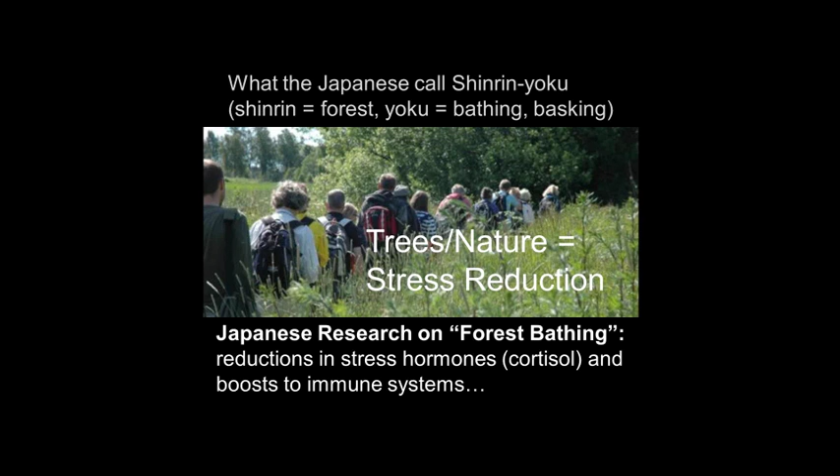So what do we mean by this concept of biophilic cities, and how might we express that? How can we articulate that? There are different ways of doing it. We could do it in a narrative sense, and here's one effort.

This is essentially the pledge that we have online: biophilic cities are cities that place nature at the heart of their design and planning, cities that actively protect, restore, and celebrate nature, biodiversity, and wildness, cities that recognize the profound power nature has to make us healthier, happier, and to lead more meaningful lives, and cities that seek to foster deep connections to the natural world. So connectedness, connections to nature, fostering connections—a big part of this.

For us, we're trying to push the envelope a bit and imagine an even deeper sense in which cities could be biophilic—imagining that cities could be places that immerse us in nature, surround us in nature. So city in a garden, city in a park, city in a forest.

One of our partner cities, Singapore, has recently changed their motto from 'Singapore, a garden city' to 'Singapore, a city in a garden,' which seems like a small change, but it's actually quite significant. Imagining that in the city, we don't necessarily need to walk to that park—why don't we imagine that we're living in the park, or living in the forest?

In Singapore, they've done a remarkable number of things, including a landscape replacement policy that requires any building in that city to incorporate nature. This is the Park Royal Hotel, a pretty amazing living building with incredible sky gardens and nature all around, actually contributing to nature from the perspective of someone walking by it. Singapore may be our best example of a city coming close to this immersive vision of a city.

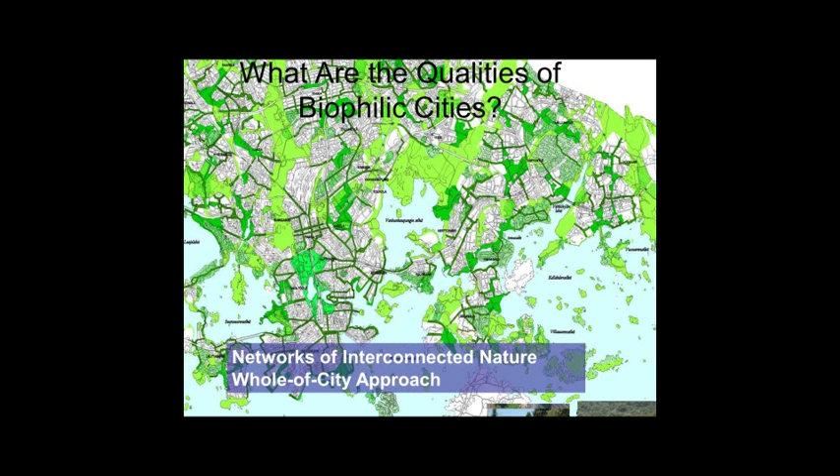Lots of other things, we could talk about different design qualities of a biophilic city. We would argue that a biophilic city is one that represents a network of green spaces and nature close to this immersive idea. This is an image of Helsinki. The notion that you walk out your door, you have nature all around you, and you can move to progressively larger amounts of nature as you move away from your home or your office.

And so here in Helsinki, in this image, the idea of moving from a dense urban core out to old-growth forests at the edge. Sometimes we talk about this as a whole-of-city approach, so it's rooftop to room, to region, rooftop to bioregion, and all of the scales in between. Nature needs to be thought about at every level, of course.

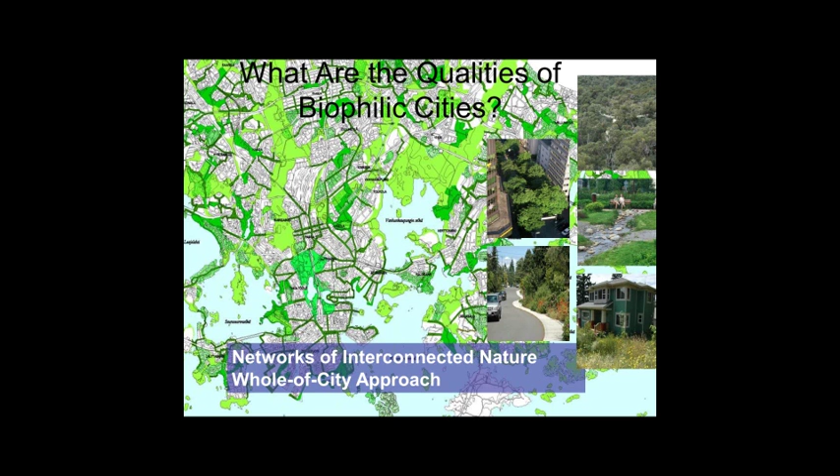We've had an active, ongoing discussion about what constitutes nature. Nature, of course, is a culturally defined term to a certain degree. And in the biophilic community, we may hear more about this with the other speakers, there is, of course, a belief in the importance of materials, building materials, and shapes and forms from nature.

The image on the upper left is from a guy named Marc Grañén, who's a Spanish designer and artist, and he's developed a system for installing green rooftops on the roofs of buses, and there are a couple of cities in Spain that have buses like this running around. Is that nature? Well, it's one aspect of nature, and so we have this broad notion of what nature is. It's not always just living nature, but lots of other ways that biophilia, that we can connect with nature.

I'm quickly running out of time. I want to make the point that a biophilic city is not just a city that has a lot of nature. It's not just the presence or absence of nature. It's how we connect with that nature. It's the human engagement of that nature. How much do we care about that nature? Do we recognize common species of flora and fauna? Are we engaged in restoring nature? Are we outside? What portion of our day is spent enjoying nature? So it's the engagement as well as the amount of nature.

We've been pondering this question, others have as well. Is there something like a minimum daily requirement of nature? We think there is. We're not sure what it is. In our Biophilic Cities network and our project, we are conceptualizing this recently through this concept of a nature pyramid, kind of similar to the food pyramid that we've been using as a way of guiding a healthy diet. So the things at the top of that food pyramid are things that you would eat, but not in large quantities. You want to build your diet based on the fruits and vegetables and things at the bottom of that pyramid.

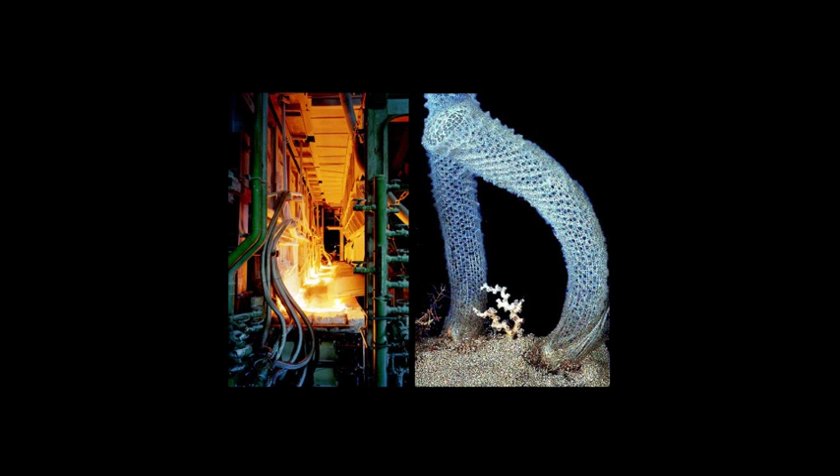Let me say a little bit about what I mean by biomimicry. These are two contrasting images. On the left, you have glass production as it's conventionally made in human manufacturing, and on the right, you have the biological equivalent, a glass sponge. We use very high temperatures and sometimes quite high pressures to manufacture materials, whereas biology has evolved to do it at ambient temperature and ambient pressure. The glass sponge actually has optical fibers of higher optical quality than man-made fibers, and that's all made just with available materials at very low energy.

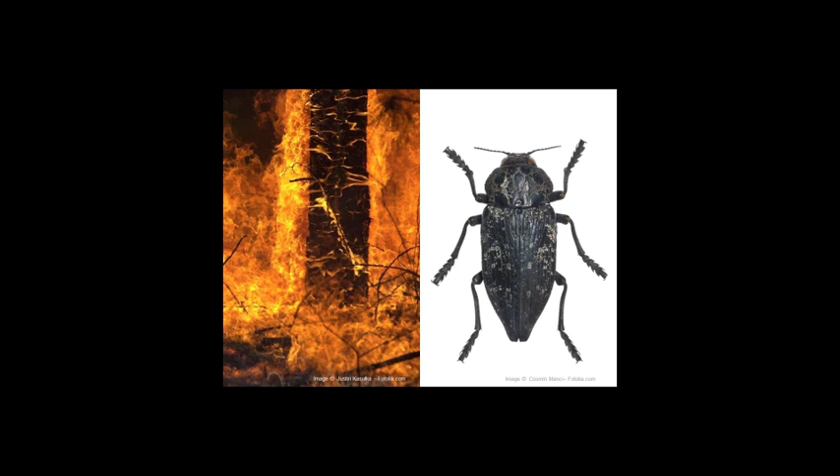Here's the biological equivalent of fire detection. Whatever room you're in, you can probably see a fire detector, and that fire detector has a continuous connection back to a power station burning fossil fuels. It probably has a range of only about 8 meters. Yet this beetle can detect a forest fire at roughly 80 kilometers, 10,000 times the range, and it doesn't need a continuous connection back to a power station burning fossil fuels. The key thing is, if we could learn to do things the way nature has evolved to do them, we could really start to make radical increases in resource efficiency, doing far more with far less.

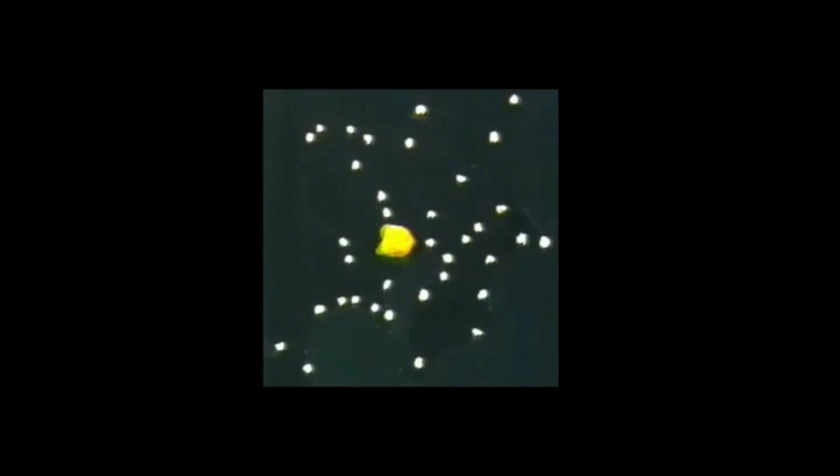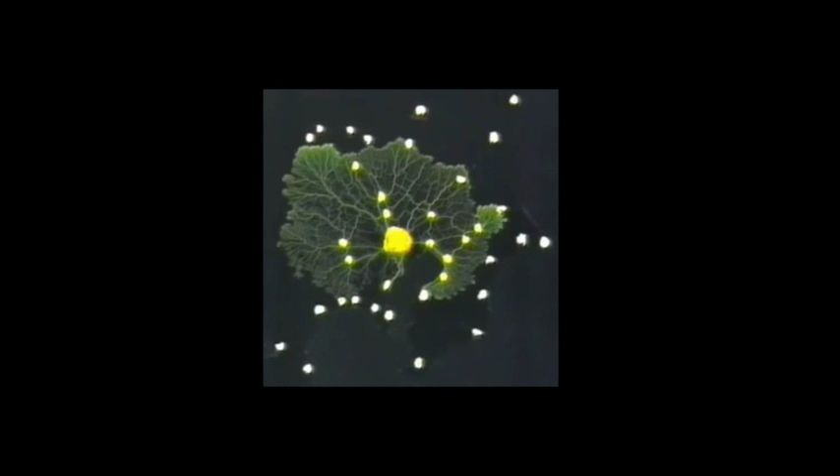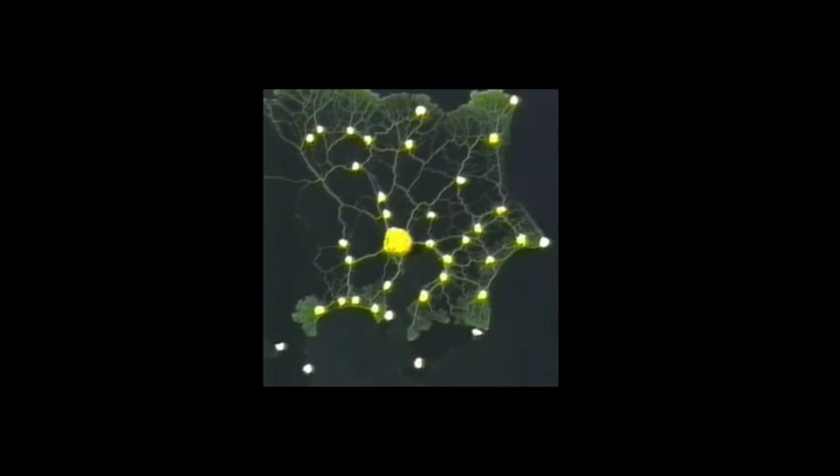Here's another example I like: the dog vomit slime mold. Slime molds are single-celled organisms, and they form minimum distance networks between sources of food. In 2010, some scientists at Hokkaido University carried out an experiment with a map of the Tokyo region. They put a little source of food on each of the cities surrounding Tokyo - those are the little white dots - and then they put a slime mold on Tokyo itself, the big yellow blob. The slime mold spread out, located all those sources of food, and started optimizing the connections between them. When it had finished, that layout exactly matched the railway network in that part of Japan. But whereas it had taken engineers thousands of hours to arrive at that optimization, the slime mold did it in just 26 hours.

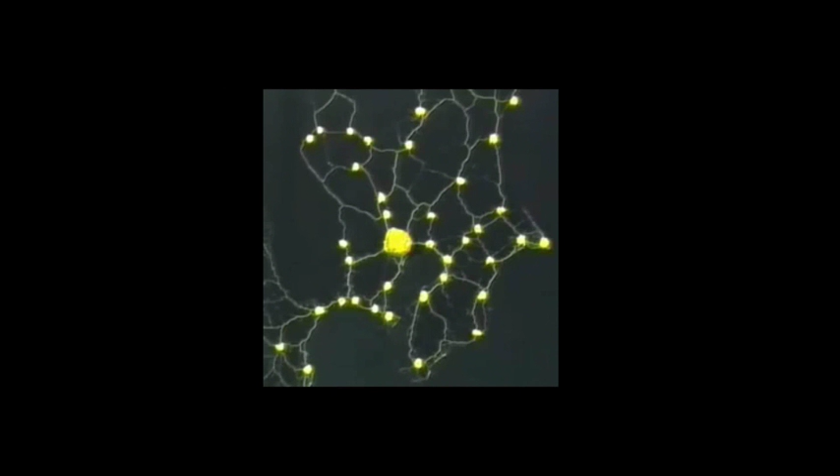So if we could learn to do things and solve challenges the way biology has, again, we could start to do things much more efficiently, saving energy and resources.

So the first project I'm going to talk about is the biomimetic office. If you're going to incorporate planting into buildings, there's a very good reason for doing that, but you need to design for quite high levels of daylight. That was one of the primary drivers for this building. We wanted it to be as far as possible naturally lit.

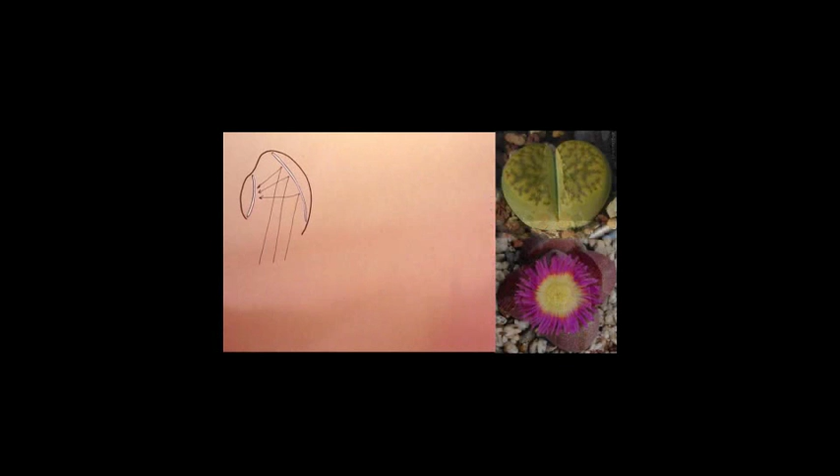We insisted on having a biologist as part of our design team who helped by identifying biological examples of light harvesting. This one is the spookfish. It has a mirror-shaped eye which can focus very low levels of bioluminescence coming up from the ocean onto its retina. Another one we looked at is the stone plant.

This is a plant that lives in deserts, and for reasons of thermal stabilization, most of the plant is below the ground. That means the chemical reactions can take place at a very steady temperature, and there's a roof light at the top that allows that light to come down into the plant.

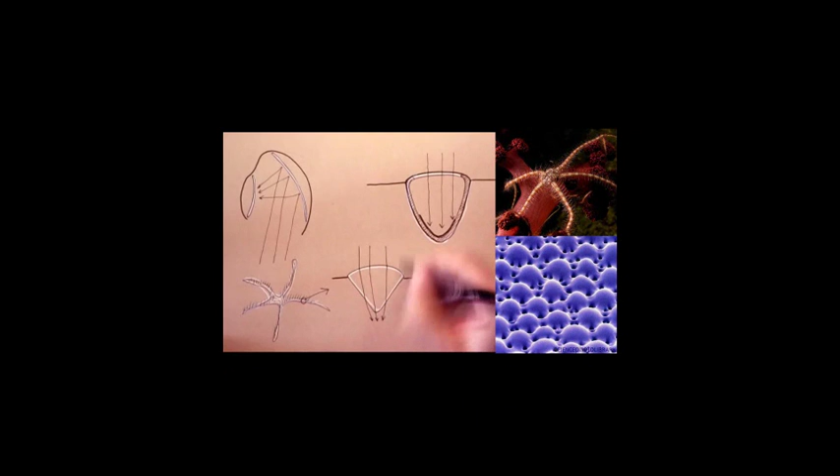Another one we looked at is the brittle star. This is a starfish that lives as much as 500 meters below the ocean surface, where light levels are incredibly low. It's evolved a covering of near optically perfect lenses over its skin, able to detect very small amounts of movement and light, so it can see predators before they see it. All of these encouraged us to think much more creatively and deliberately about how we would bring light into the building.

A fairly conventional way of designing for daylight in offices is to look at the right distance between window walls. In London, you can find lots of examples of really deep office floors, maybe 25, 35, sometimes even 40 meters between windows. You know those are going to be high energy buildings because they'll be artificially lit and air conditioned.

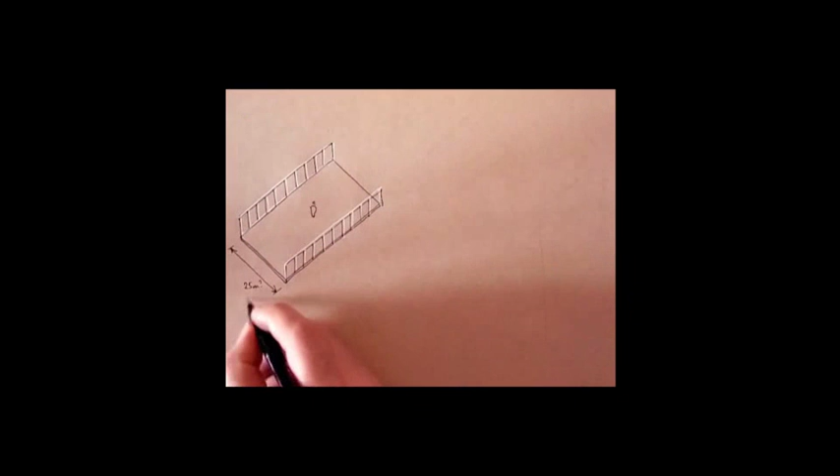We decided that the right dimension was about 12 meters, so no one was further than 6 meters from the nearest window.

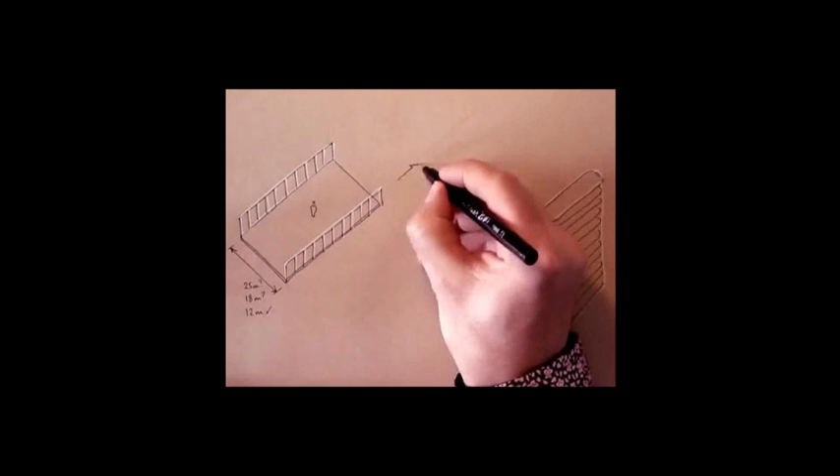Thinking about what this translated into in terms of building form, one approach would be to take these narrow floor plates and stack them into a tower form. That would be fine if we were dealing with high land values in a central urban location, but we wanted to develop a more universal concept than that.

So we looked at two other building forms. One was a ring of offices around a central atrium, and the next was a more linear approach: two linear blocks with a linear atrium.

It was the third one that seemed to work best when we analyzed light levels. Using daylight software, when we looked at this in plan, we found we were getting a curved pattern of shading around the middle of each block because of the shading effect of the opposite block. So the next move was to simply bend those floor plates so that we get a very even quality of light all the way along.

This produced two further challenges. Firstly, narrow floor plates aren't great for creative clusters of people—you need some wider areas. Secondly, this wasn't making very efficient use of a rectangular site, and we were probably going to end up with a rectangular site.

So then, learning lessons of surface area to volume optimization in biology, we elaborated the plan form into this undulating form. We still had no point further than 6 meters from the nearest window, but now we were getting much better facilities for creative clusters of people, and we were making more efficient use of a rectangular site.

Still with daylight, we looked at the building in section, and found it was reasonably easy to get enough light at the top. The challenge was how to get the light further down.

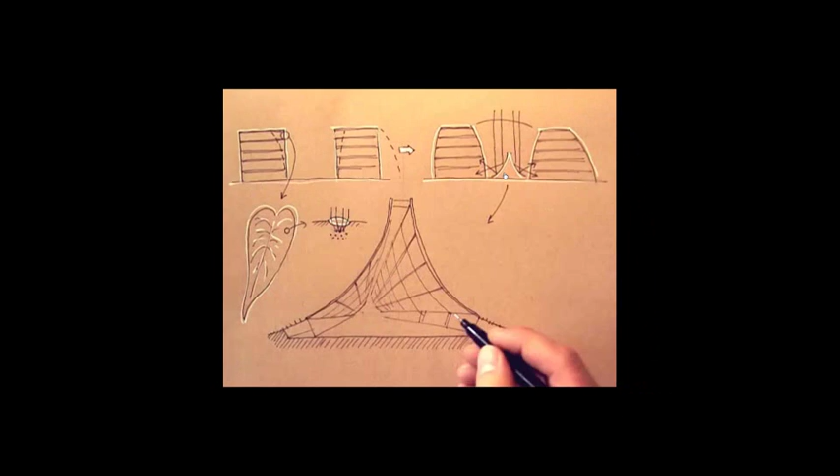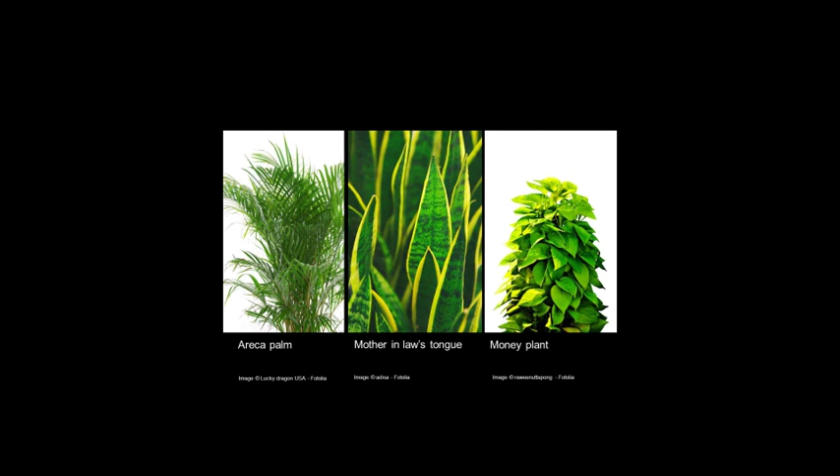Looking at this space underneath, in biology, often structures serve multiple functions. So we decided this would be a great space to turn into a really dramatic meeting space that would add value to the building. Designing for high levels of daylight means you can incorporate a range of plants, and NASA concluded these ones can deal with nearly all the contaminants in indoor environments.

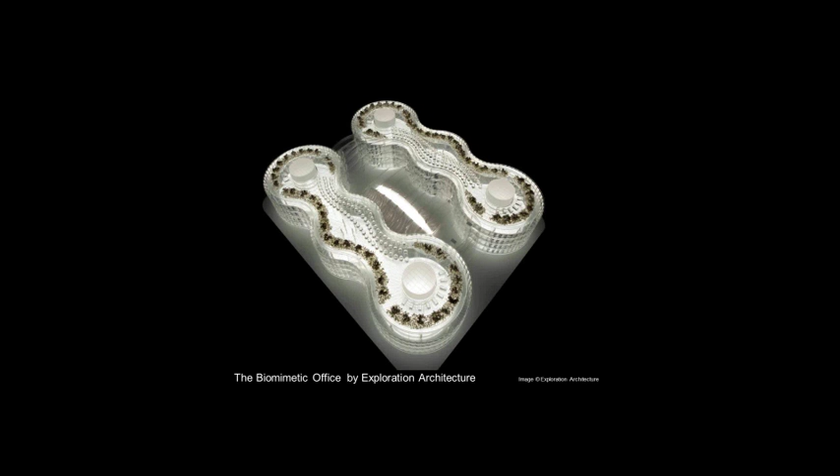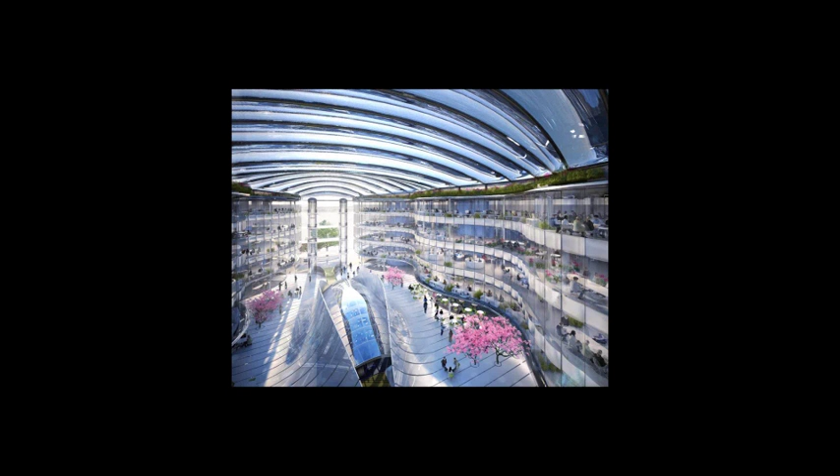This is how the scheme looks now. The form is very much driven by daylight. That's the spookfish light reflector in the middle, and that's another view. This is how the atrium would look, flooded with natural light. The engineers involved have predicted it should be one of the lowest energy buildings in the world when it gets built.

Now moving on to another project. This is one we've been working on in India, the Zero Waste Factory. There were a number of things we were trying to do here, using biological approaches to water treatment, biological systems as a way to move towards zero waste, and trying to incorporate really generous amounts of planting on both sides of the factory. So the factory has roof lights throughout, and every part of it has views out to nature on both sides. That's radically different to the conventional model for textile factories in India.

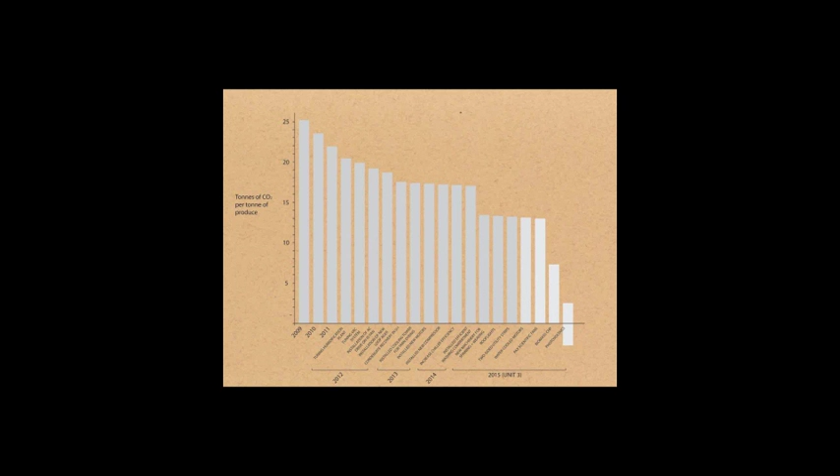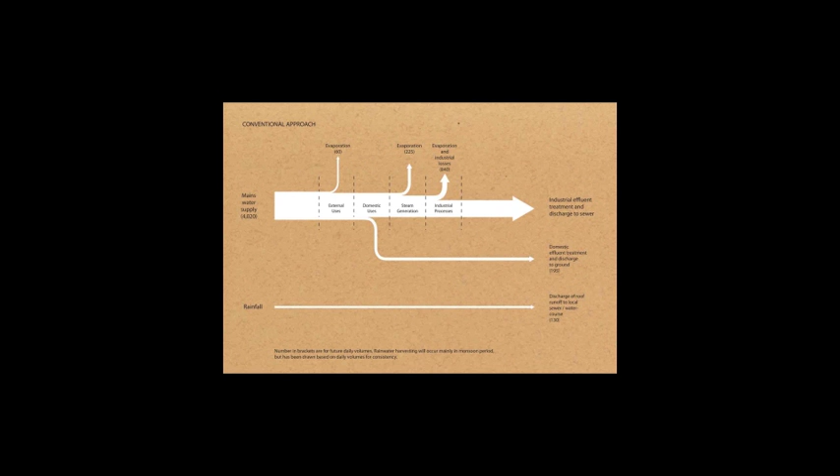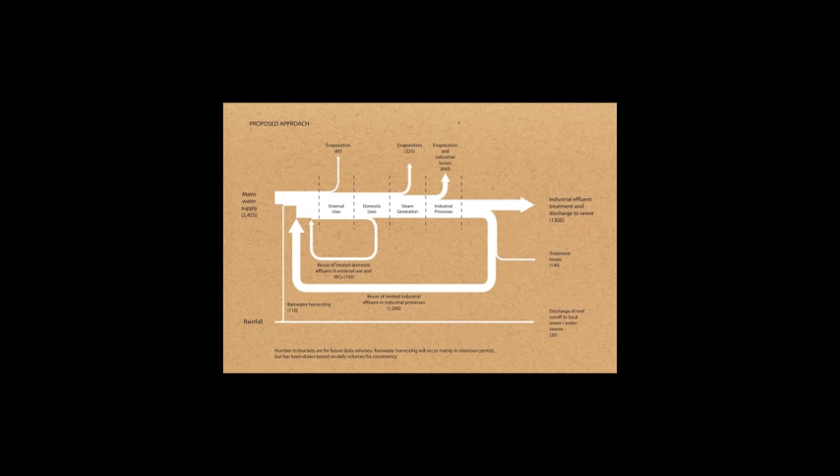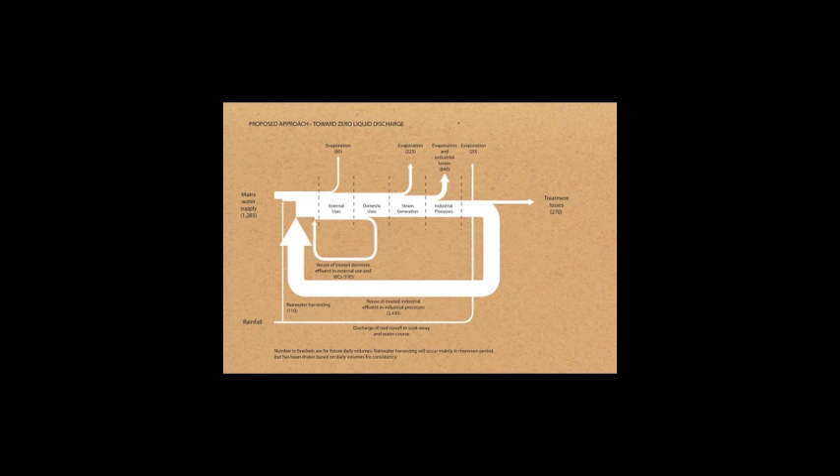The client had already done quite a lot in terms of energy saving, so our main focus was on turning the water system into something much closer to a closed loop scheme. This is a fairly conventional approach. This is the approach we're proposing, where most of the water gets treated using biological forms of treatment. There is an approach that gets closer to zero liquid discharge, but at the moment that's looking a lot more expensive, so we're working with the client on trying to reduce that.

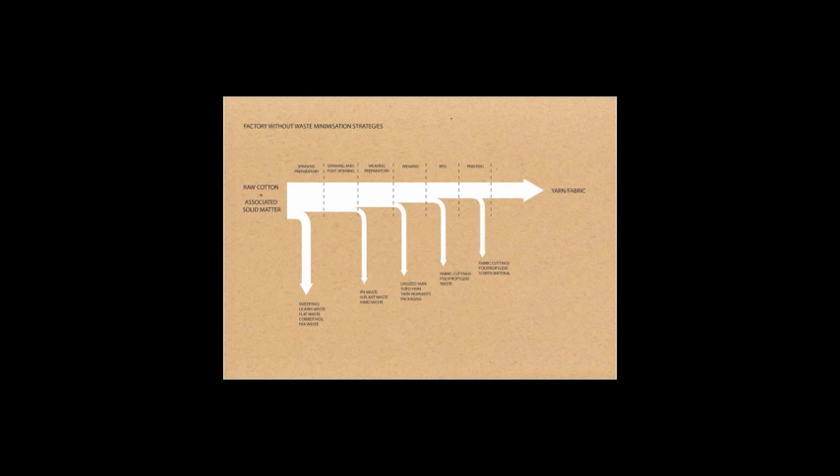And then this is the solid waste. This is a conventional approach, which produces a lot of waste materials. We've found, working with the client, that we're actually able to turn most of those into materials that can be sold for other uses.

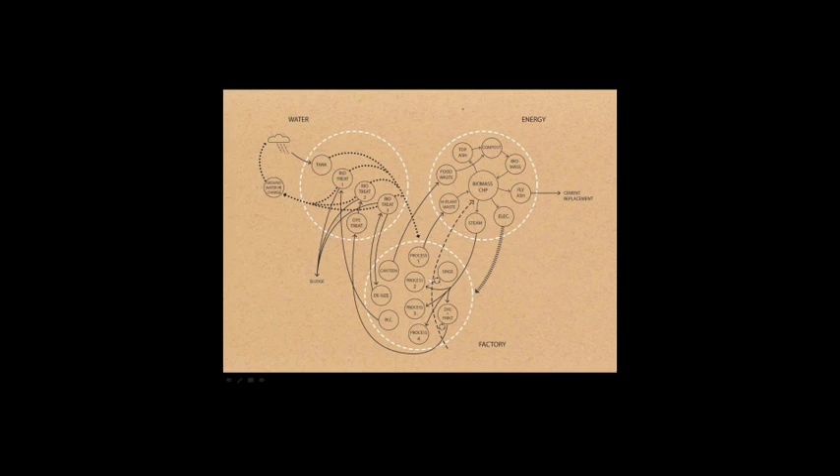We managed to design out most of the problematic dyes, so most of this stuff can be treated with biological forms of treatment, and the water can go back into the process. So that's another view - all this down the middle is part of the biological water treatment. We're trying to get dual benefits: it's doing the job of cleaning the water, and it's also serving an amenity or biophilic benefit, giving people something nice to look out onto when they're working in the factory.

And finally, we've only got three minutes left - the Sahara Forest Project. This is a model based on a beetle which harvests its own fresh water in the desert, and that turned into a type of greenhouse that is cooled and humidified with seawater. So we can grow crops in arid regions with a fraction of the water of conventional approaches, and it actually allows us to harvest some of that water in the same way as the beetle does.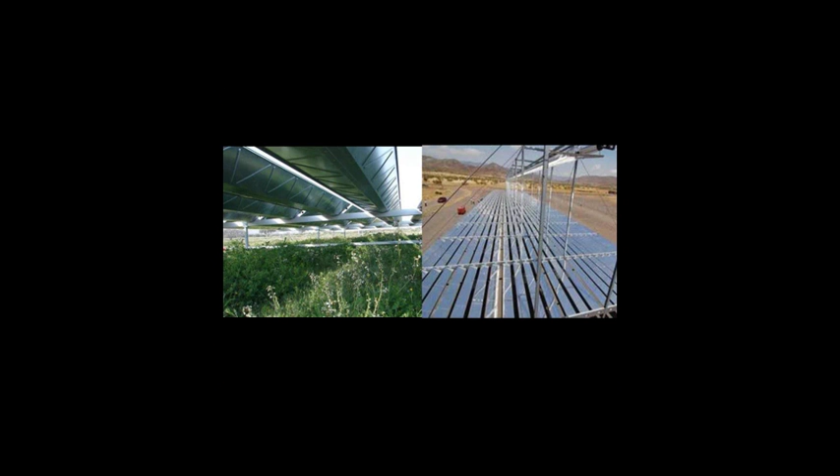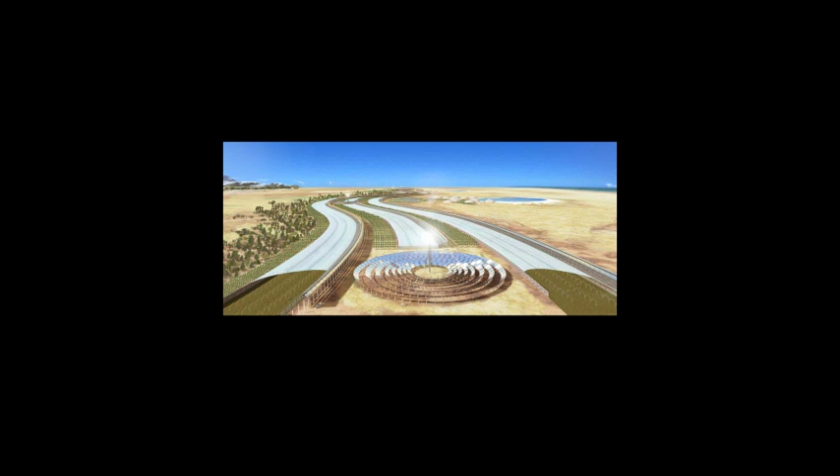We're putting that together with forms of solar energy that have very interesting synergies. The shade created by those mirrors or solar panels makes it possible to revegetate areas of desert underneath. This is a sketch of what we're proposing, and this is how it would look at large scale. It's a model for how we could create zero carbon food in some of the most water stressed parts of the planet, as well as generating renewable energy and locking up carbon back in desert soils.

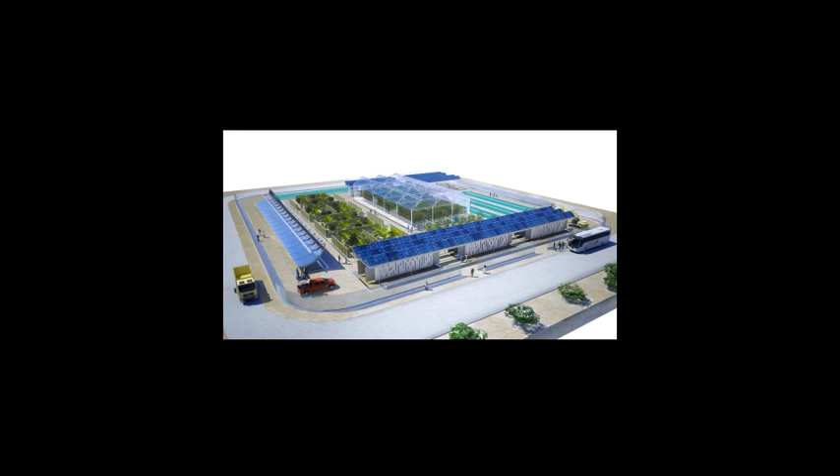I'm going to skip through now, running short of time. We built a version of this, opened in 2012 during the climate change talks in Qatar. Apart from all the technical aspects of the project, we also monitored what happened to the biodiversity on site.

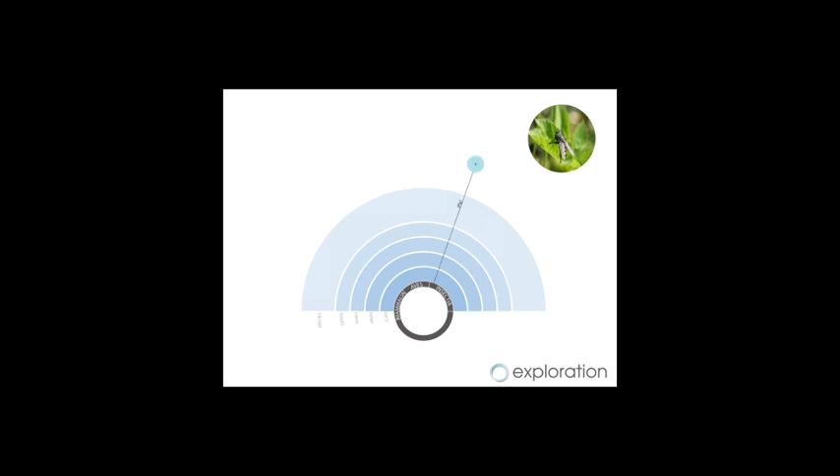It was a bare patch of desert to start with. This diagram shows what happened over the course of the next 8 months in terms of birds, mammals, and insects. The first things to appear were flies, nothing too interesting there. But the same day the first plants came to site, we had the first birds appearing - common house sparrows - and also the first insects, grasshoppers and crickets.

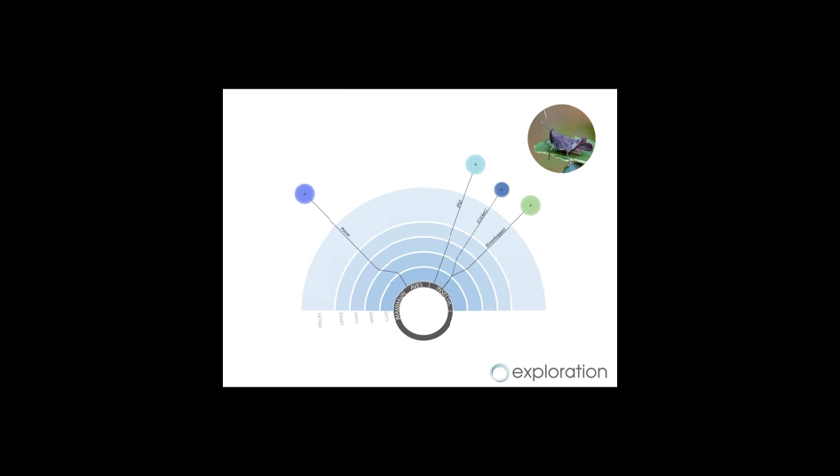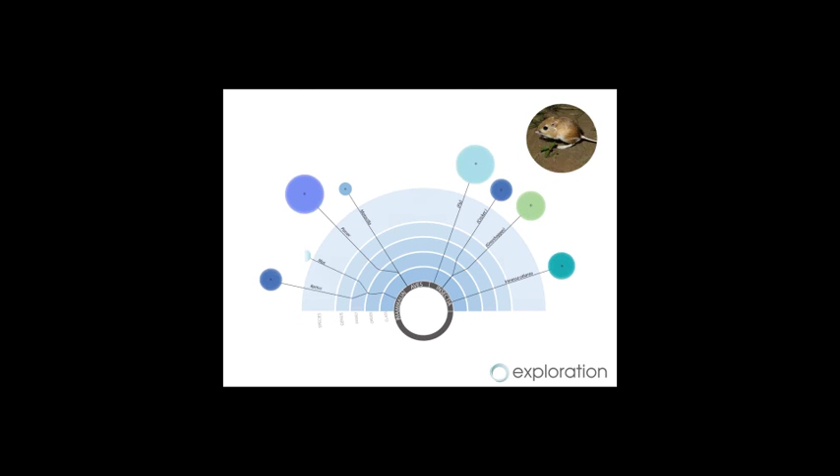About a month later, we had the first butterfly and more types of bird, wagtails. We had more and more insects. Then we had the first problematic species, rats, and they started multiplying rather quickly. We also had mice. The number of birds was increasing. We had the first dragonfly 3 days after the algae ponds were filled.

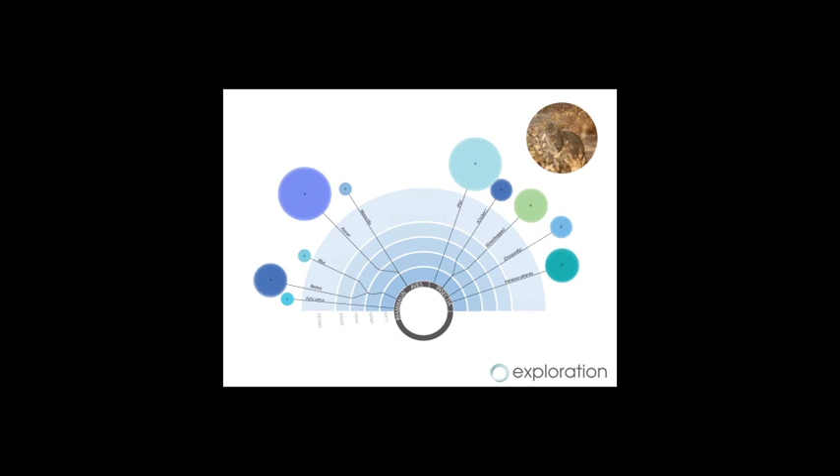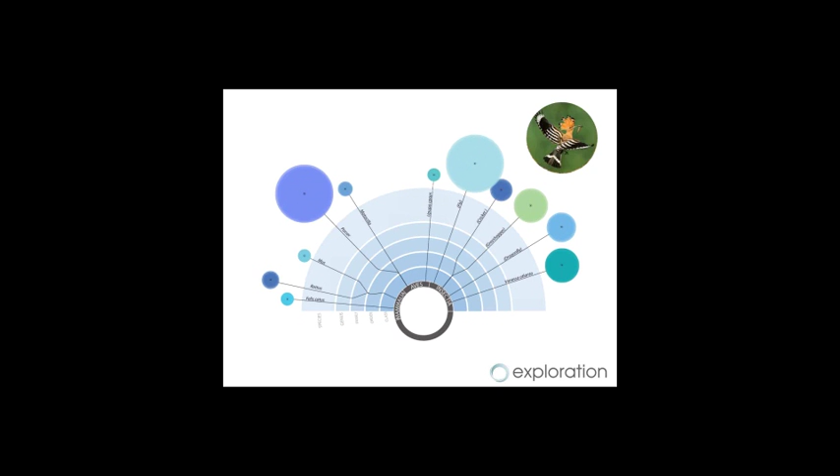Then the number of rats started going down when a feral cat appeared. The bird species carried on increasing. This was a fairly rare bird, a hoopoe, which we saw on site. And then when the halophyte plants were planted, we had rufous-tailed shrikes and more wagtails. Eventually we had the first example of an indigenous mammal, called a jerboa.

And all that was achieved in just 8 months on a site 100 meters by 100 meters. I find it very encouraging to see that nature, if you give it the right opportunity to recover, has an amazing capacity to recover. And that's why I feel these models of regenerative development are really strong ones that will allow us to develop cities for the ecological age and to restore some of the damage we've done to ecosystems over the last century or so. Thank you.

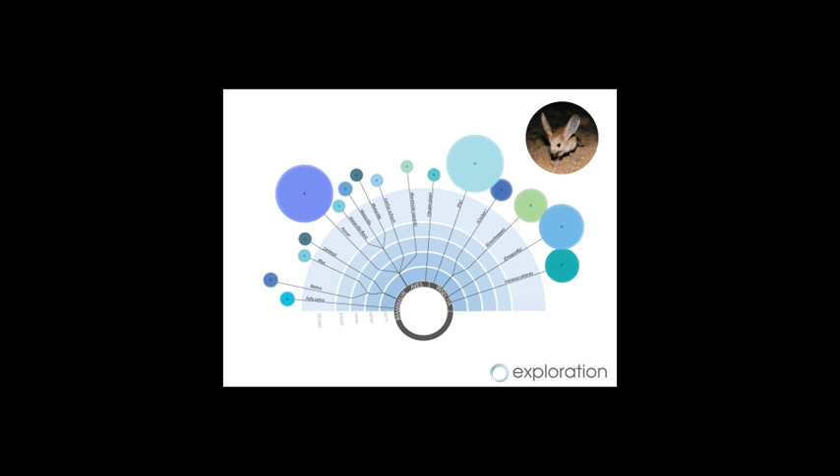These first two talks we've had really emphasize how expansive the idea of biophilia and biomimicry can be for designing spaces for humans and nature to coexist.

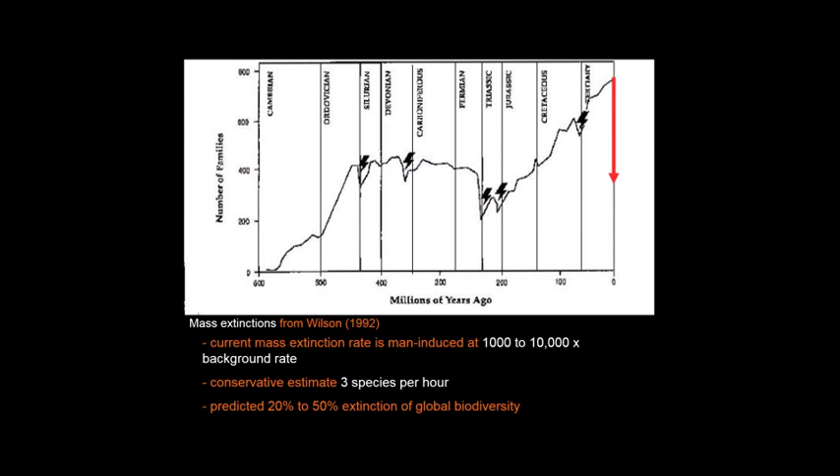Another key sense of urgency is the mass extinction we seem to be creating, on a par with previous mass extinctions in geological time. And as Tom Wolfe said in The Bonfire of the Vanities, no one seems to be able to take reality straight anymore. We drug ourselves, take various tranquilizers to get through life, and urban pathologies are quite rife.

Now, what is an urban landscape? This wonderful book on the urban cliff revolution, which I recommend reading, shows how separating buildings and landscape around it is quite often how projects treat greening and landscaping, but actually that's a false dichotomy. We came almost certainly from scree slopes, rocky cliff sides, and then caves. Nearly all the plants we eat came from those original ancestral habitats, so it's not at all surprising to be living in high-rise settings around landscapes.

Therefore, the point is that landscape is buildings and structures as well. The idea of urban landscape as a term is relatively new, and it's worth reinforcing, because so often in projects the two are separated.

This quote from the European Landscape Convention makes the next step, which is it's not just buildings and the landscape around them, it's people. That's obvious in a way, but the interactions between them create something which is not either of those things. It's not a physical thing, but a conceptual, psychological thing.

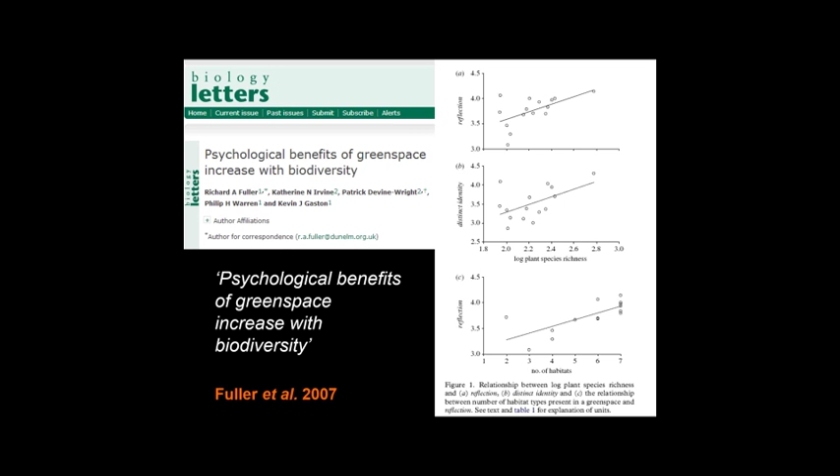We need to make this sophisticated in relation to biodiversity, because biodiversity - essentially an indicator and product of the ecosystem, or underpins it - also relates to the ecosystem services you get linearly. Here's a paper from the UK which shows that our psychological benefits increase with the biodiversity content of parallel ecosystems.

This is a paper I wrote with Ken Yeang, which underpins this and says: look, in industry terms and in offices, if an office development with lots of money can do something to restore ecosystems, then the ecosystems can do an awful lot for the profit of those companies.

This was the first time the British Council for Offices looked at the thing as a two-way street, rather than just what can they do for nature as a sort of charitable sop.

And now we are getting into the world of economic valuations. I'm not saying that everything in nature needs economic valuation, but having thought long and hard about this - if economic valuation can get us where we want to be, frankly, I don't care. We need to do anything we can to stop really bad decisions.

For all the beautiful images from Tim and from Michael, the actual model around the world that is still the norm is urban sprawl, with very little of anything we've been shown.

This is a wonderful publication worth looking at from the wonderfully named Terrapin Bright Green from New York City, which starts to explore these economic arguments, which need to be at the fingertips of every designer and every ecologist who works on the urban condition.

I'll leave this thought with no further elaboration: if you're dealing with a developer who's creating benefits for others, what does he or she get out of it? I've been working more and more with the idea of marketing - what's the point of innovating if you don't market what you've got? You have to trust the market to understand that what you're selling is better. Then the people building all this can get benefit.

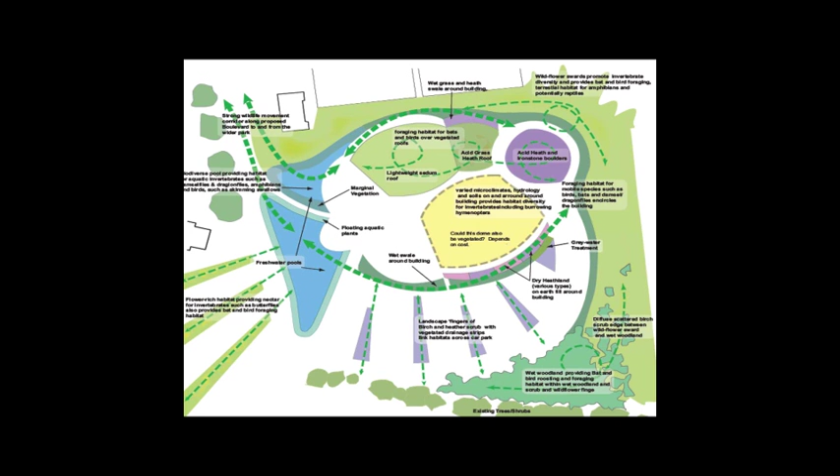We can also create installations that function with nature, with strong reference to past cultural environments, keeping what Alexander Pope called the genius loci, and incorporating biological indicators when we do.

One example from London, on the River Thames - an old oiling site for Shell oil with a big jetty outside for ships to turn up. But in its derelict state it had a covering of cormorants and herons, very unusual to see so many in this part of London. They were all going to be lost because this sort of development has no room for them.

So we put in floating hotels, which we built in Germany and brought over, and the birds used them. I saw a man from Holland and asked him why he thought that was done. He said, well, those are fish birds, right? And fish birds means fish in the river, which means a good place to live. These indicators and the sense of place and time can be done with gestures that are as much artistic as ecological.

We can show how interventions can not only be biophilic and biodiverse, but can have impacts well outside their boundaries. Again, in London, at Greenwich Peninsula, here is a derelict area which had the biggest gasworks in Europe. Instead of leaving the old wall or rebuilding it, we cut it down and created a terrace that floods with the tide.

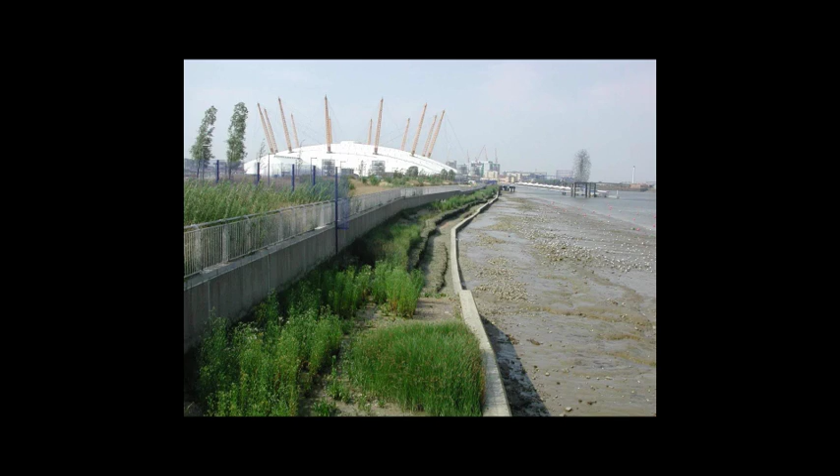That becomes very biodiverse. We explain what all that is doing as an ecosystem, and it becomes the biggest artificial sea bass nursery in the UK. Those fish then go out and become the fish in the North Sea.

We can show the power of multiple biophilic interventions when we start talking scale - that's coming up again in the next URBIS webinar. So at Stratford, the athletes' village in London, now best new place to live in London, Mayor's Water Design Excellence, all that stuff - the whole point was to try and make these sorts of interventions writ large, from living roofs down to ground landscape.

So living roofs based on four types of UK natural habitats rather than just greening. And then down at ground level, the water filters through wetlands, which people have told me they've set up their shops purely because of this environment there.

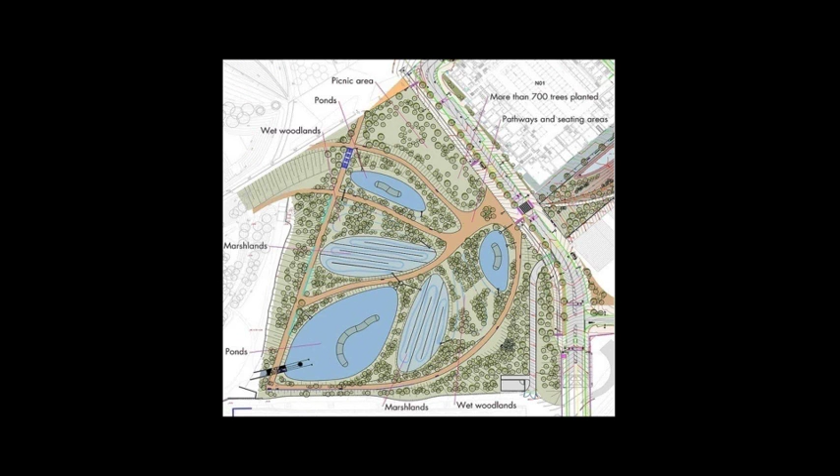A final treatment wetland, which itself is a piece of land art, has many different ecosystems to treat the water and polish it, putting it into a final polishing lake. From there you can flush toilets in a new school at the top of the site and start to close the water cycle loop and make it beautiful.

And then we can set targets for nature - I've thought about this quite a lot, and one of the problems is that engineers and architects are taken seriously while biologists are not in urbanism, generally speaking, when it comes to design teams. Part of that is because we don't take ourselves seriously.

If we have the sorts of metrics that Michael was showing in his presentation on the Sahara Forest Project, then we can start getting quite good at predicting what's going to happen, and sell that, and actually use it as a metric, a measure of success.

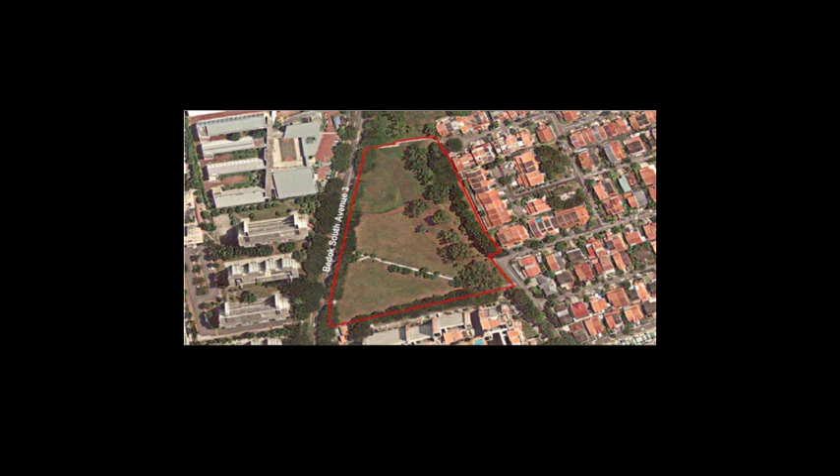So, for example, in Singapore, an urban site to be redeveloped had this marvelous target set by the government of being ecologically designed, not only green but designed along ecological principles - to create the city immersed in the garden, with water cycle loops and water treatment within the system. We helped co-design these with landscape architects.

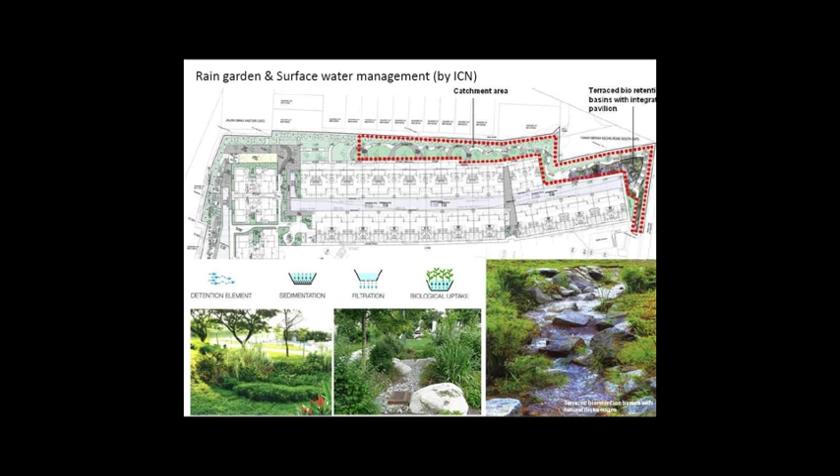But here you see the same landscape seen from a non-humanocentric point of view, from the wider biodiversity, making specific interventions that ensure these species turn up. And to do that, you can actually be quite accurate about it.

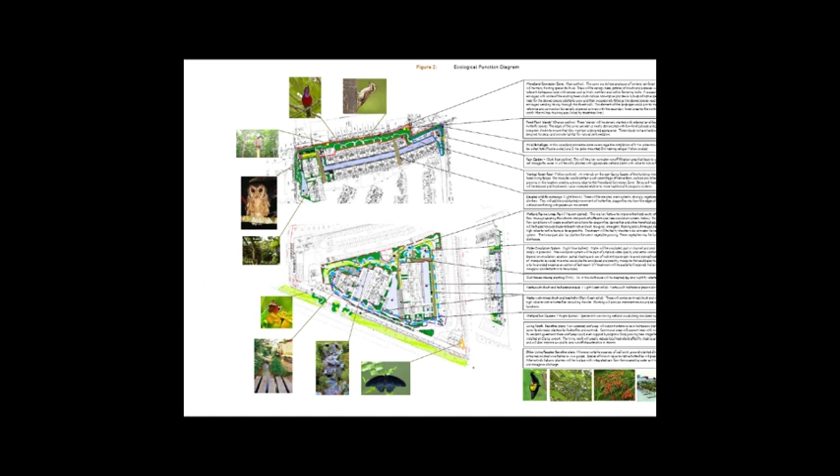We came up with an idea of a biodiversity matrix, which is a particular part of the architectural master plan, showing where particular species should turn up, when they should turn up, what they needed for their life cycle, and when we would expect them to do so, whether it be flora or fauna.

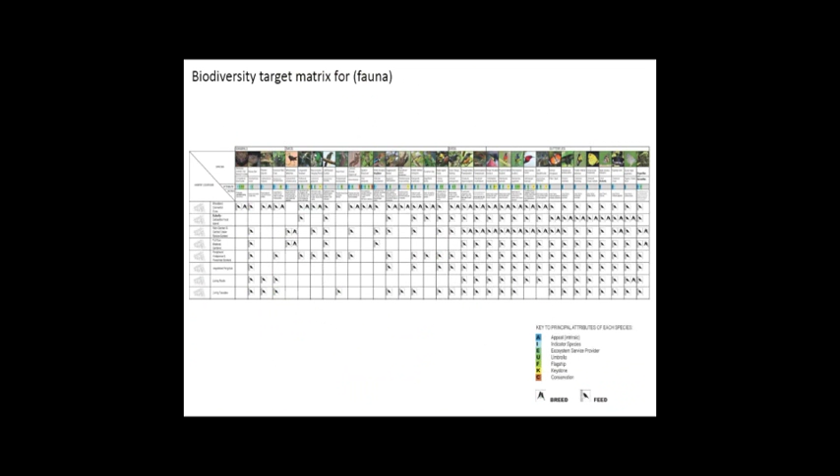This is a very useful tool that many architects like, because it starts to show that this is not something random where who knows what's going to happen next. It can be predicted to quite a large extent, and the more we work at it, the more likely we are to succeed.